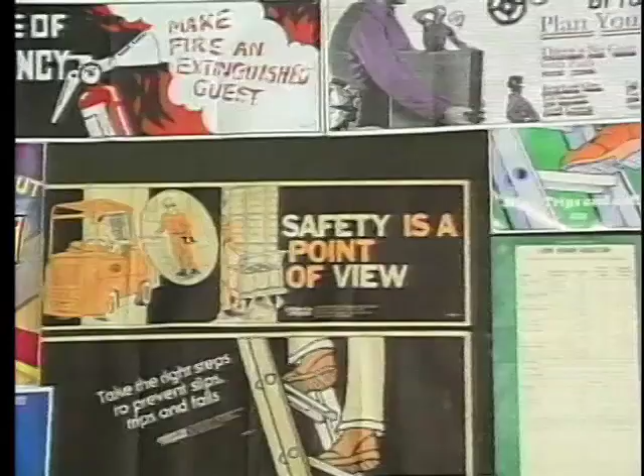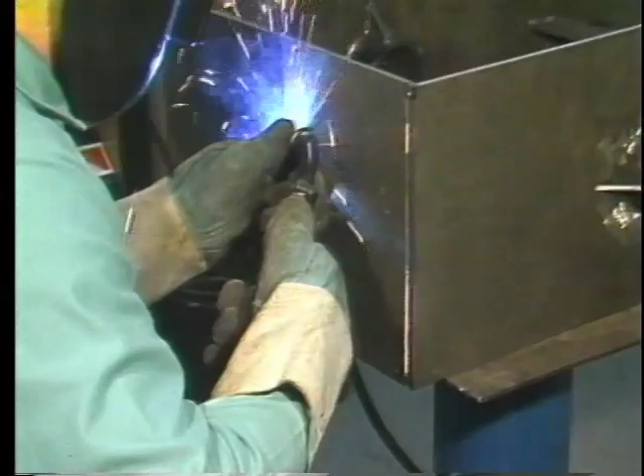Workers face daily exposure to potential hazards. Correct precautionary measures can prevent accidents and make welding as safe as any other metalworking occupation. Metalworking hazards include exposure to hot metal, sharp edges, and working around moving machinery. For welding, there are additional hazards such as electric shock, arc radiation, air contamination, flying objects, fire and explosions.

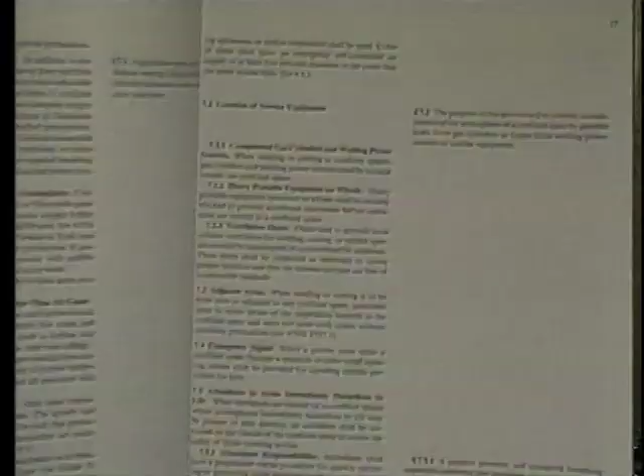To ensure safety for workers, there are laws which prescribe regulations and warnings. The Occupational Safety and Health Act makes many national standards enforceable by law. The most important is the American National Standards Institute Z49.1, Safety in Welding and Cutting. This standard states that welding and cutting operations pose potential hazards from fumes and gases, electric shock, heat radiation, and even excessive noise.

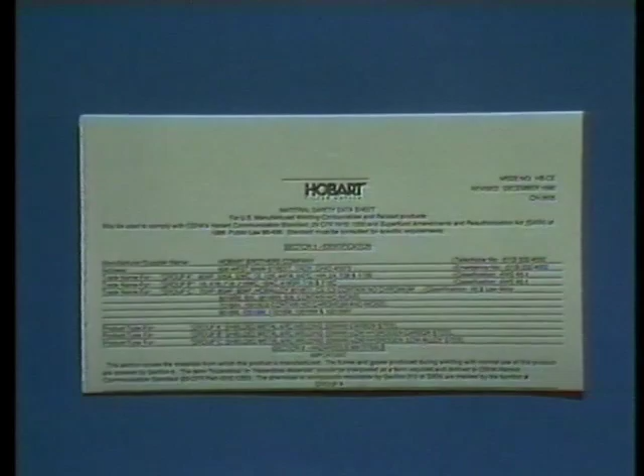Employers are required to establish comprehensive hazard communication programs to inform workers about dangers in the workplace. By the same token, the employee is obligated to learn and use safe practices, obey safety rules, and take proper care of equipment. The use of material safety data sheets, or MSDSs, is mandatory. These cover the potential hazards of every substance taken into the workplace.

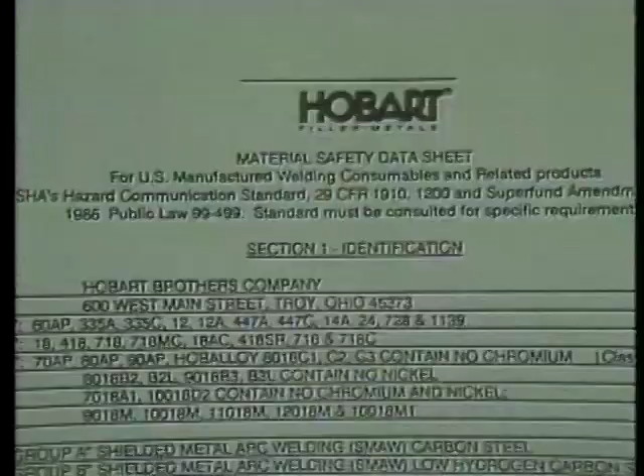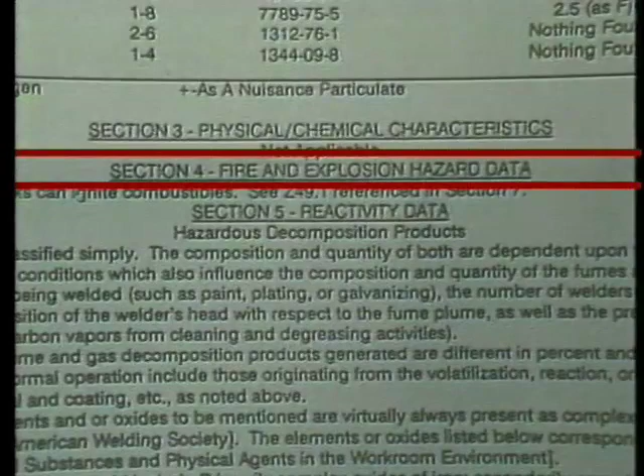Welding electrode suppliers furnish MSDSs, which should be kept on file in the personnel or welding department. Copies should be given to all supervisors, welders, and anyone connected with the welding area, and should be read and understood by all. An MSDS is divided into sections that identify the manufacturer and materials and list any hazardous filler metal ingredients, physical and chemical characteristics, potential fire and explosion hazards, emergency procedures, precautions and control measures, and reactivity data which explains what happens to the filler metal during welding.

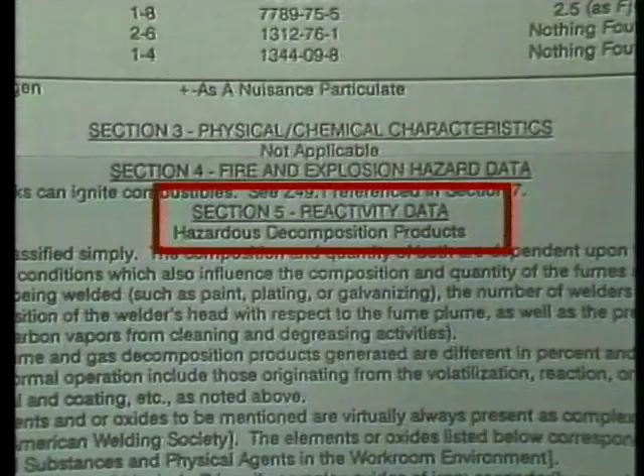The electric arc is a powerful source of visible, ultraviolet, and infrared light, all of which can be harmful unless suitable protection is used. Proper clothing should have no openings or gaps which expose the skin to ultraviolet arc burns. All personal clothing should be flame retardant, dry, and free of oils. Wool clothing is better than cotton because it doesn't disintegrate or catch fire.

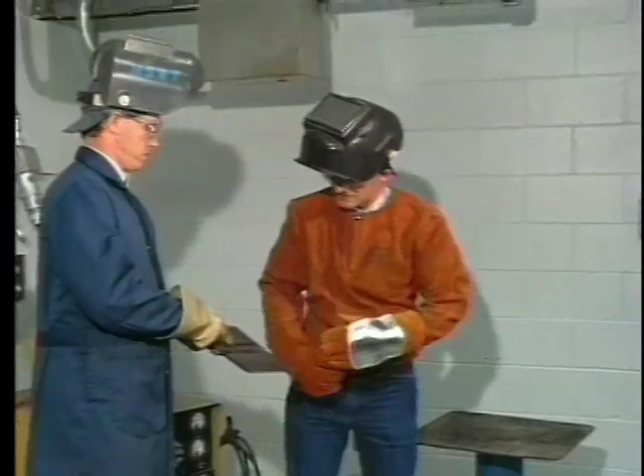For heavy-duty welding over 200 amps, a leather jacket or apron, leather gauntlet gloves, safety glasses, spats, head cap, and a helmet with a proper filter lens must be worn. Pants legs should be without cuffs and cover the shoes. The shoes themselves should be safety types with high ankles. Even with light-duty welding under 200 amps, the skin must not be exposed. Other personnel in the welding area should wear the same type of protective clothing.

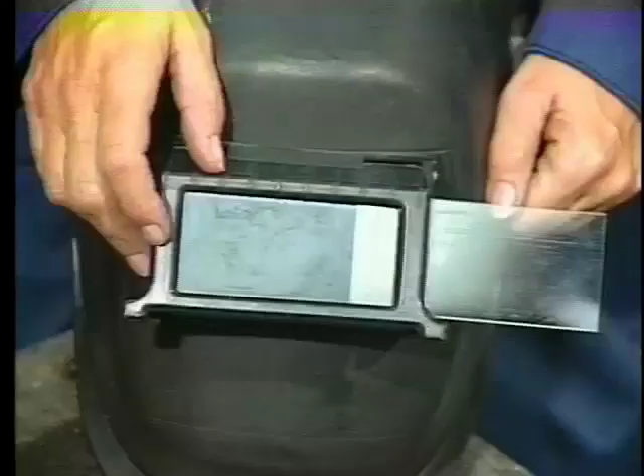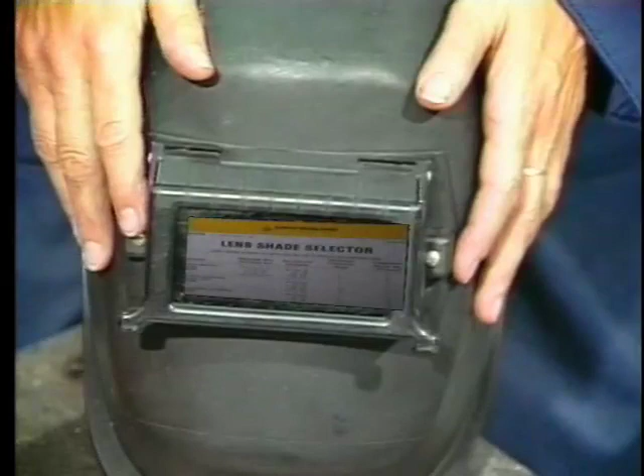Whatever the welding application, safety glasses should be worn at all times. Contact lenses may be worn for welding, but these do not replace safety glasses. Helmets should have the proper filter lens, protected from spatter by a clear cover plate. Lens shades use a numbering system to help select the amount of darkness required for the amount of amperage used. Refer to the American Welding Society's specification for safety in welding and cutting to determine the proper shade needed.

If unprotected eyes are exposed to the arc even briefly, ultraviolet arc burn can result, which causes the sensation of hot sand in the eyes for up to 48 hours after exposure. Up to 6 hours may pass before any symptoms appear. Eye drops or eye washes will give temporary relief. If the pain persists for more than 24 hours, a doctor should be consulted.

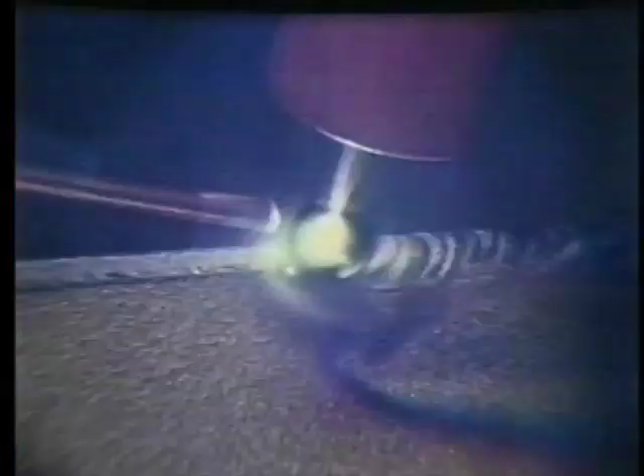Precaution signs should be posted in and around the welding area and should be in agreement with the American Standard specification for accident prevention signs. This includes warnings that anyone with a pacemaker should take special precautions or avoid arc welding areas. Heat from the arc is infrared radiation, which is harmless if the welder is properly protected. But ultraviolet radiation is invisible and much more potent.

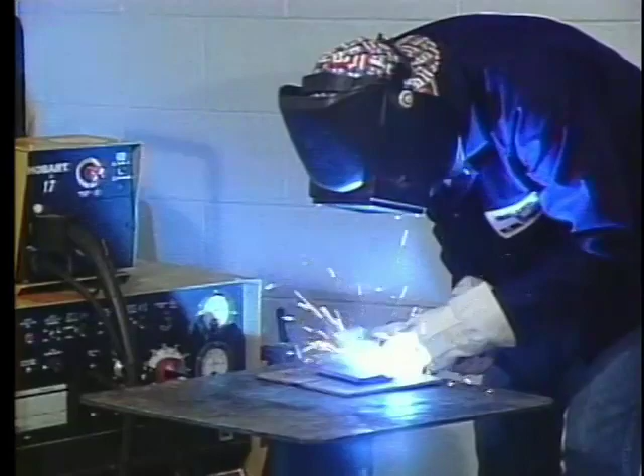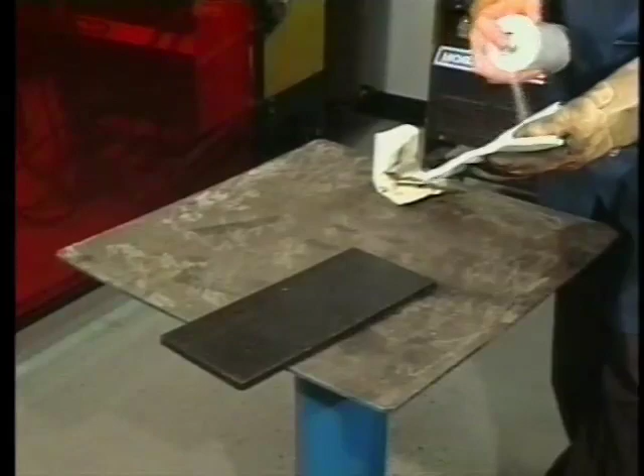Screens should be used around the welding area to shield nearby workers from the radiation and should be free from tears. If welding is done in an enclosed booth, it should be painted with a flat finish that will not reflect ultraviolet light. Metal degreasing or cleaning solvent operations should be kept at least 200 feet away from the welding area, since the ultraviolet radiation can decompose some cleaning chemicals into phosgene gas.

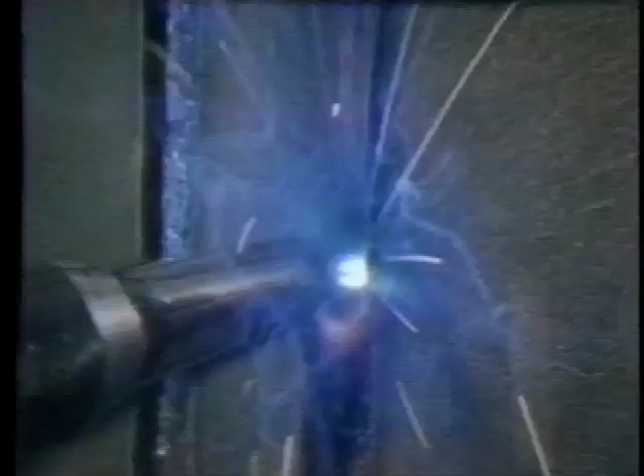This is a harmful substance with the odor of new mown hay, and if detected, the area should be evacuated and ventilated until the gas has cleared. Because of this hazard, make sure solvents on metal are thoroughly removed before welding begins. Ultraviolet light can also produce ozone, an active and harmful form of oxygen that can cause coughing, wheezing, chest pains, or a burning sensation. Proper ventilation will reduce the ozone concentration around the arc area. It is not a long-range hazard since it changes back into oxygen a short distance from the arc.

Electric shock is associated with all electrical equipment or tools. Tools usually operate on ordinary 115-volt household voltage, but this is higher than the output of a conventional arc welding machine. National standards are set by NEMA, the National Electrical Manufacturers Association, or by the Canadian Standards Association. Use only welding machines that have one of these names on the nameplate.

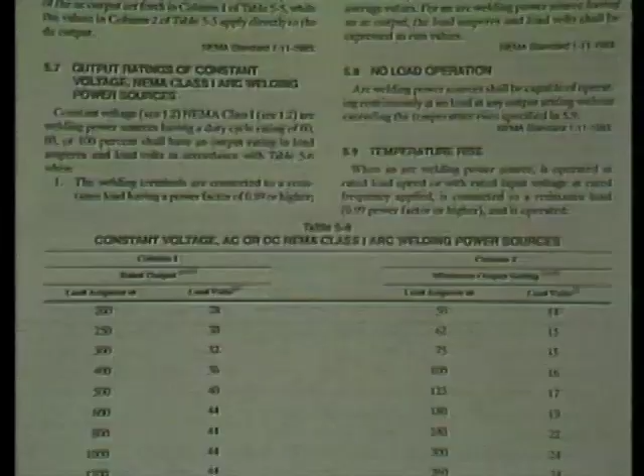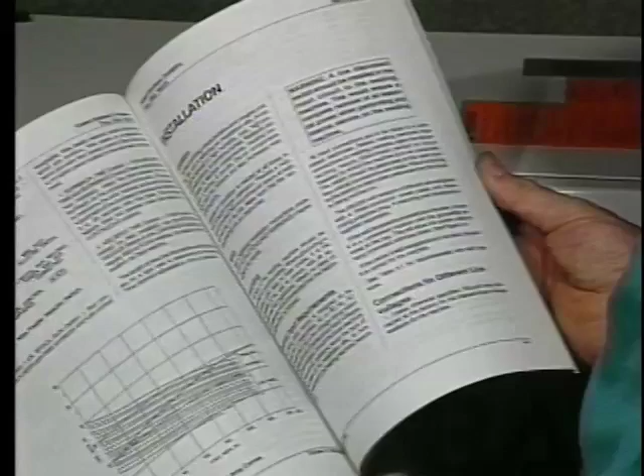NEMA specifications provide classes of weld machines and requirements for duty cycle and maximum no-load voltage. Machines must be installed in accordance with NEMA and local codes. Instructions are given in each manufacturer's manual.

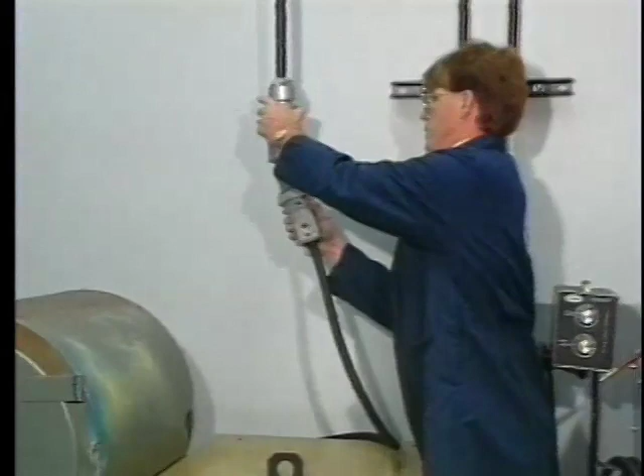If a grounding lead or conductor is part of the power supply cable, be sure it is connected to a properly grounded switch box or building ground. Use a separate grounding lead if it is not part of the supply cable. Note that this does not replace connecting the machine's ground lead to the work surface, which is essential for safe welding operation.

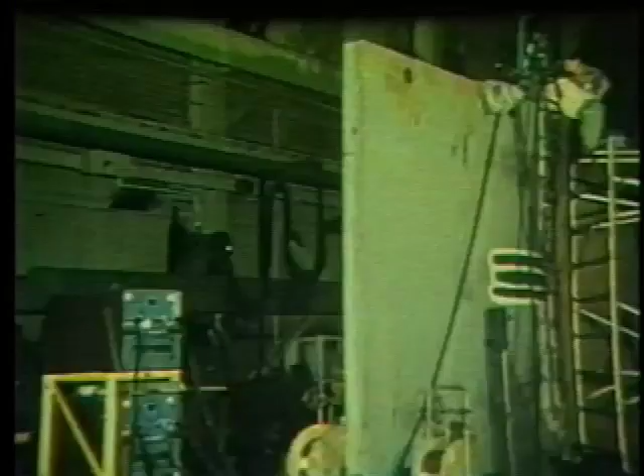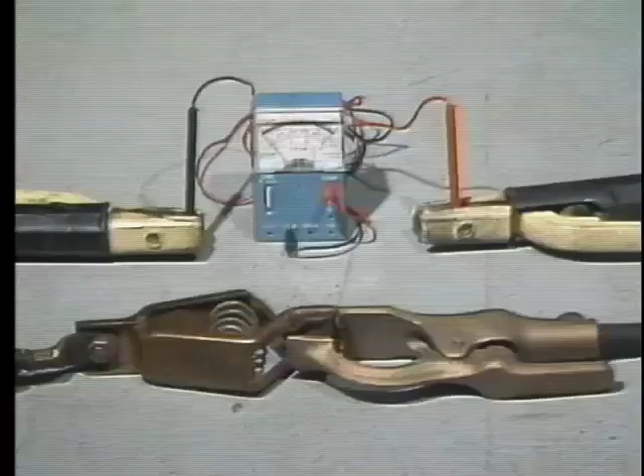When paralleling transformer machines, identify each phase of a three-phase power line. This assures that the machines will be in proper phase with each other. To check this, connect the work leads together, and then measure the voltage between the electrode holders, and it should be practically zero.

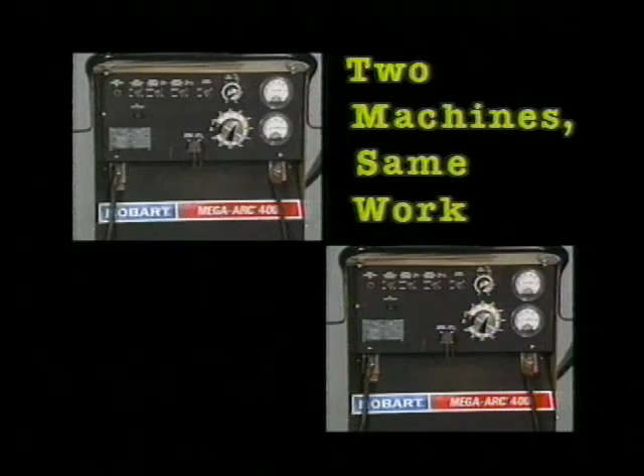If more than one direct current machine is connected to the same weldment, be sure that both are set to the same polarity, both positive or both negative. If they are not, the voltage between the electrode holders will double. Also, do not attach both AC and DC machines to the same weldment.

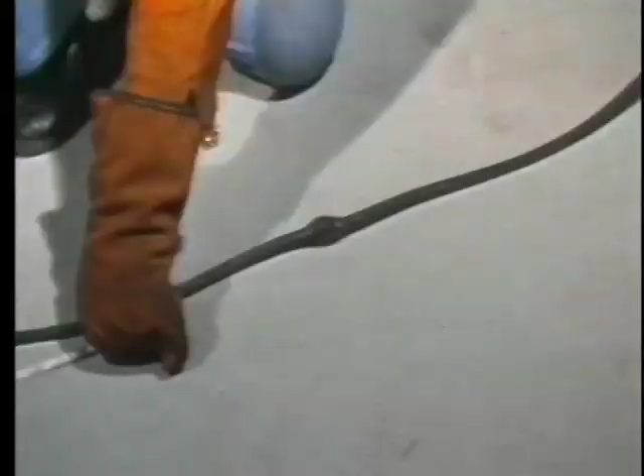Electrode holders should have flexible cables. No splices should be within 10 feet of the electrode holder or gun, and they should be well insulated. Welding machines should be located in a well-ventilated area with nothing obstructing the ventilation ports. Electrode and work leads should not be wrapped around the machine or the welder.

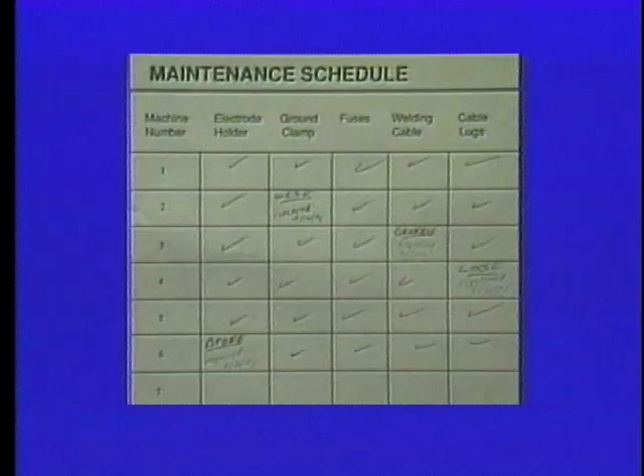Work areas must be kept dry. Dampness increases the chance of electrical shocks. A regular inspection and maintenance schedule should be maintained and records kept.

No matter how small the problem, no one but properly trained maintenance personnel should attempt repairs on welding machines, cables, guns, work clamps, and electrode holders. All power sources should have disconnect switches for maintenance purposes. Notify your supervisor of any problems or potential hazards.

Air contamination is the smoke and fumes rising above the welding operation. These contain two types of contamination: particulate matter and gases. Adequate ventilation will reduce smoke hazards. Potential harm from fumes and gases depends on the chemical composition of particulate matter, the concentration at the welder's breathing zone, and the duration of exposure.

Particulate matter is small, often invisible solids suspended in the air, such as tobacco smoke, household dust, and pollen. When welding, the kinds of particulate matter relate to the type of electrode or filler metal, the welding process itself, the current employed at the weld location, atmospheric conditions when welding outdoors, and the composition of base metals and coatings.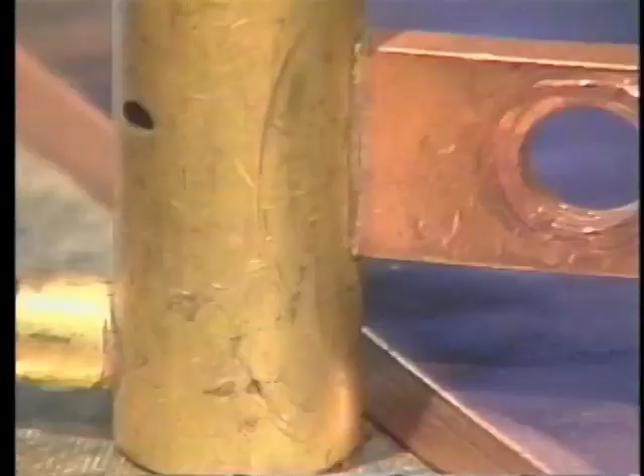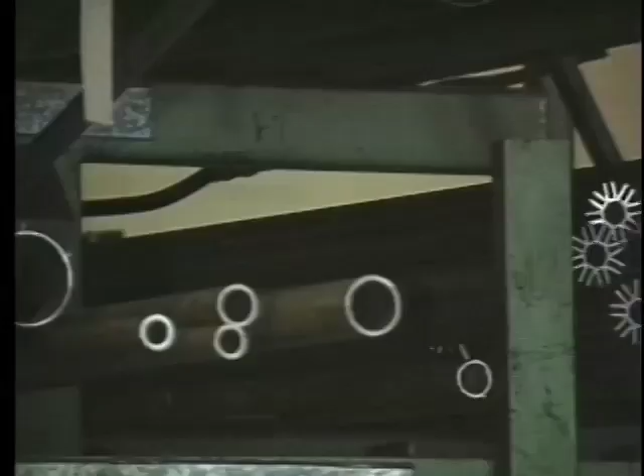Certain metals create hazardous airborne contaminants, such as brass, bronze, zinc, and others. Coatings on the metal, such as paint, oil, grease, or plastic, can also release contaminants. Welding on old painted steelwork can produce smoke containing particles of lead. Newer pipe is sometimes coated with a plastic protective material which can be harmful. Proper ventilation and parent metal cleaning and preparation will protect the welder from all such fumes.

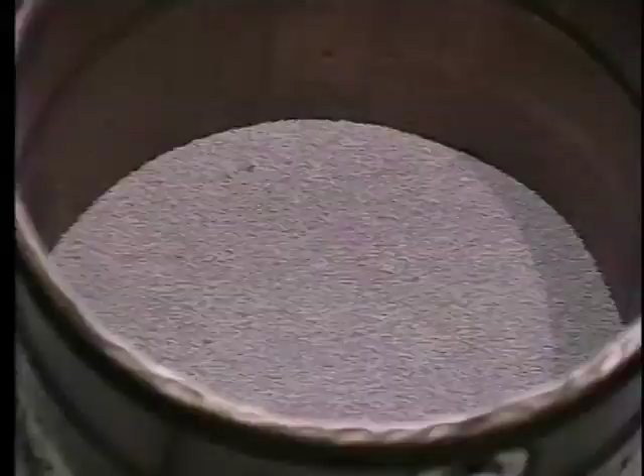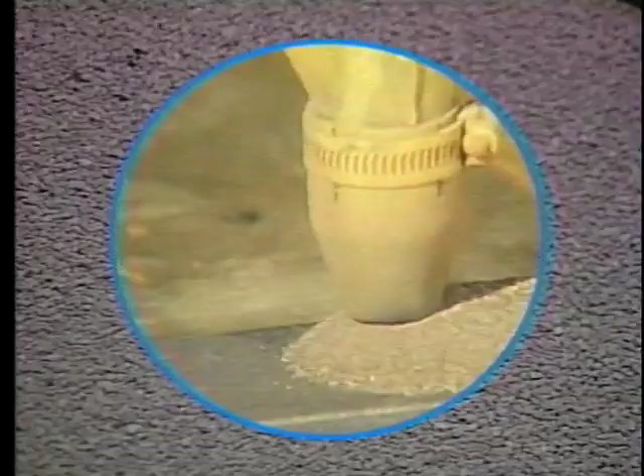An additional source of gases is flux, which is found in the coatings on shielded metal arc electrodes and inside the electrode wires used for flux cored arc welding. The flux used for submerged arc welding can also give off gases when heated. The most common gas produced by electrodes and filler wires is carbon dioxide. Carbon monoxide can also form. These gases should be removed from the welding area.

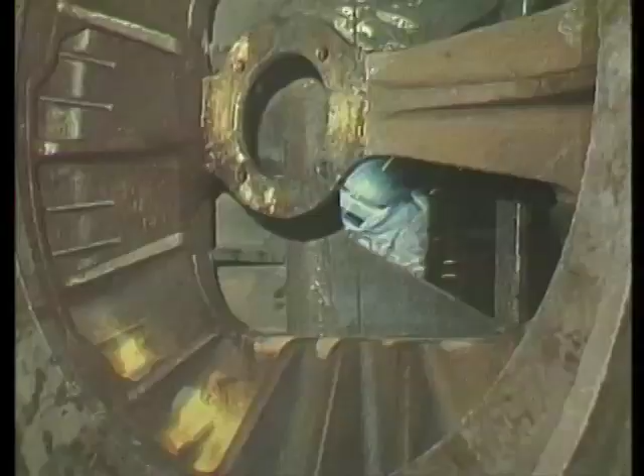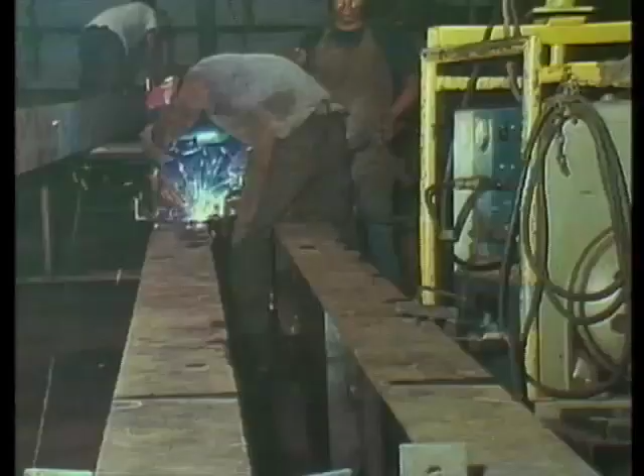Confined areas such as small and restricted spaces, tanks, pressure vessels, tunnels, or small rooms with poor ventilation can become death traps. The hazards here are poisonous, flammable, or explosive gases, oxygen depletion, or heavy concentrations of smoke and particulate matter. Exhausts from engine-driven machines are a prime source of carbon monoxide and carbon dioxide, even in less confined areas, and should always be channeled outside. Refer to American National Standards Institute Z117.1, Standard for Welding in Confined Spaces.

When welding in confined areas, lookouts should be assigned to watch the welders and other workers in the area. Voice contact should be maintained throughout the welding operation. In extremely confined areas like tanks or vats, welders should wear lifelines, harnesses, or both, so they can be pulled out if they are overcome.

The atmosphere in enclosed areas should be checked before welding is attempted. An explosimeter can be used to test for explosive concentrations of gases and adequate levels of oxygen. Oxygen should not be used in place of compressed air to ventilate enclosed compartments. If the oxygen content of the air is even 5% more than normal, the area could become combustible when an arc is struck.

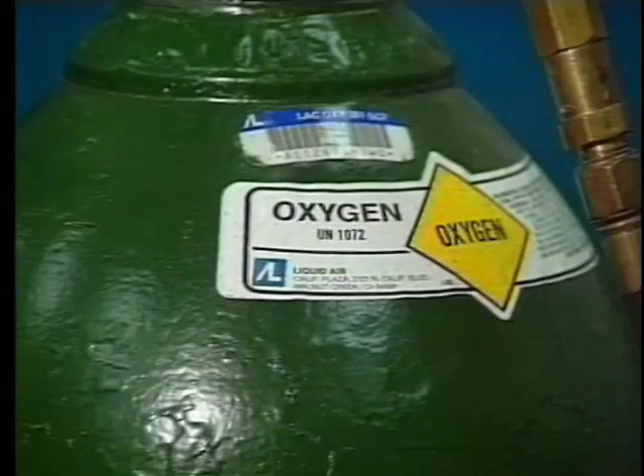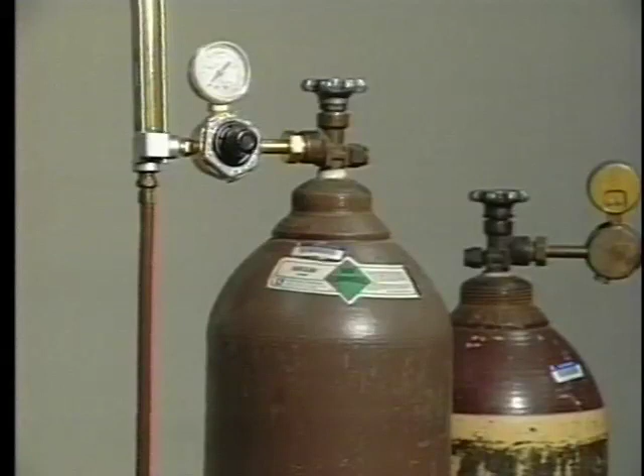On the other hand, if heavier than air shielding gases such as argon and carbon dioxide are used in confined spaces, the oxygen content will drop, perhaps below breathable levels. Such areas should be monitored to assure proper oxygen levels. To ventilate these areas, air exhaust and fresh air supply systems should be used. If this is impractical, a respirator or self-contained breathing apparatus can be used. Respirators can be selected and fitted by trained personnel following OSHA standards.

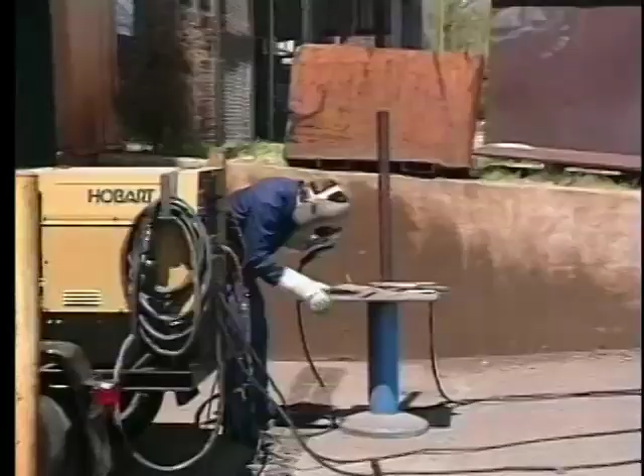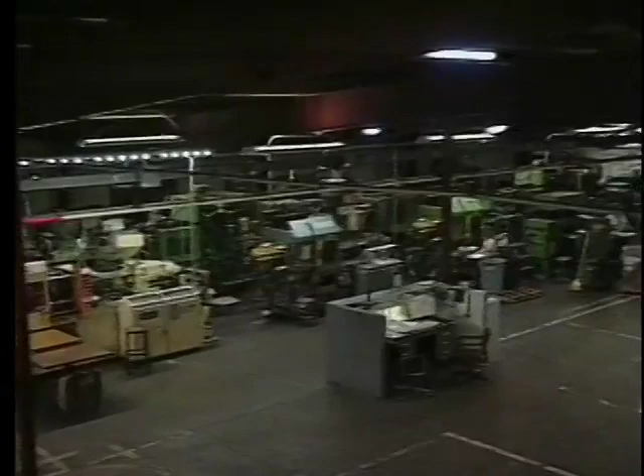There are 3 types of ventilation. Natural ventilation is welding outdoors or indoors in an area that provides 10,000 cubic feet per welder with a ceiling of 16 feet and with no partitions, balconies, or other structural barriers. When hazardous materials are welded, natural ventilation must be supplemented.

General mechanical systems use roof exhausts, wall fans, or other large air movers in order to keep airborne contaminants low and prevent explosive gas mixtures from accumulating. Such systems can also be used in individual welding booths.

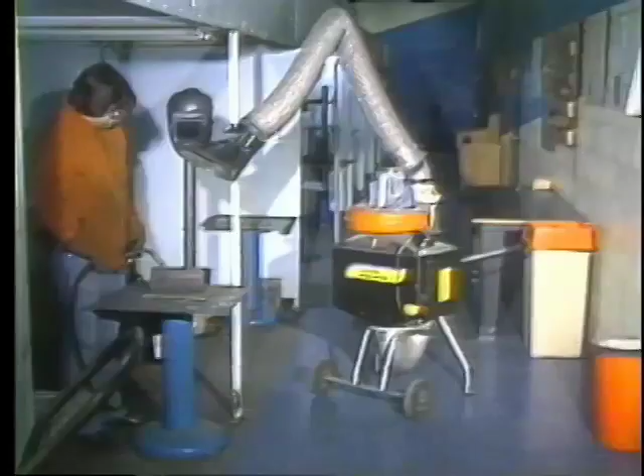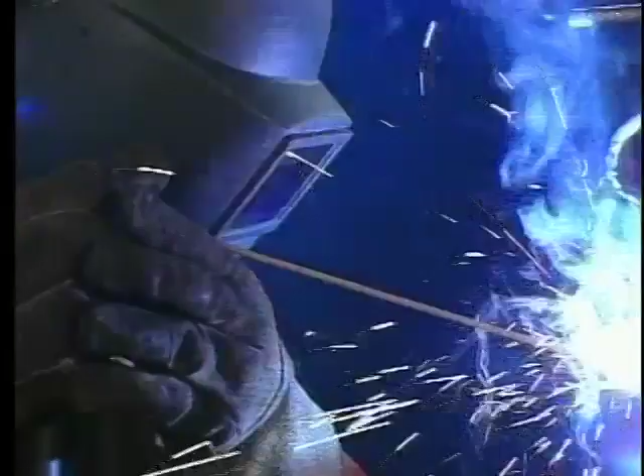Local exhaust systems have a fixed or movable hood placed near the work area or even in the welding gun. Movable hoods can be adjusted as desired to pull smoke and fumes away from the welder. To check if the area is properly ventilated, samples can be collected and analyzed from the breathing zone under the welder's helmet.

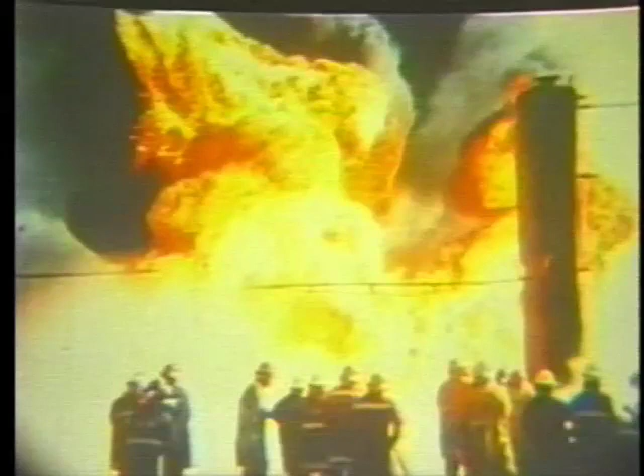Many industrial fires are caused by cutting and welding in areas that are not specified or approved for such work. The 3 elements of the fire triangle, heat, fuel, and oxygen, are present in most welding operations. The heat from the arc, torch, or hot metal, the fuel from gases or combustibles in the area, and oxygen in the surrounding air. Sparks can fly up to 35 feet or more and fall through any cracks or openings

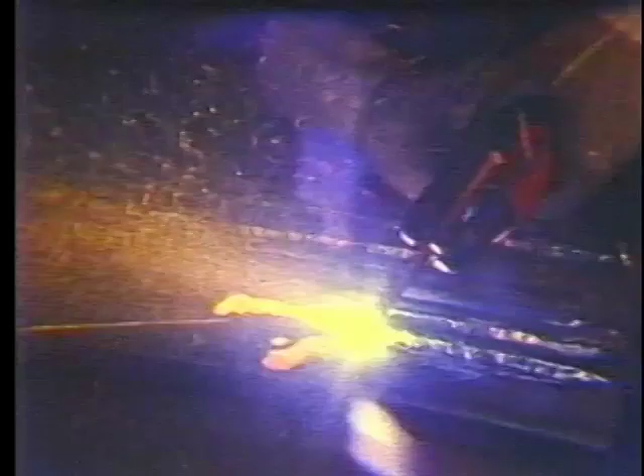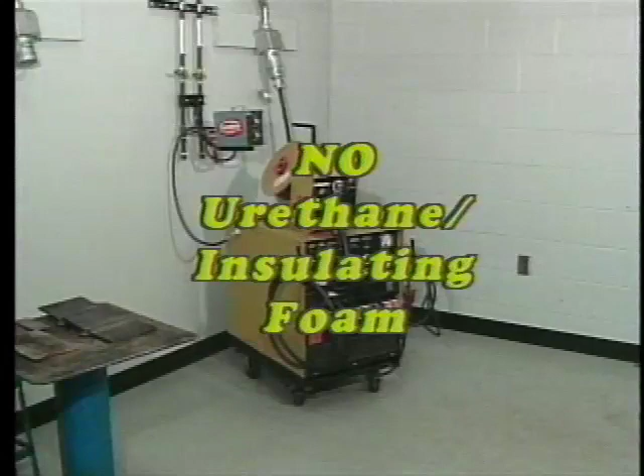in partitions and floors. All combustibles or flammable materials should be removed from the welding area. The area itself must be constructed of non-combustible materials. No urethane foam or other insulating organic foam should be part of the area. Gas lines should be installed in accordance with codes and specifications. Fuel gas cylinders should be stored in specified, well-ventilated areas or outside away from oxygen. They should be stored vertically, with valves closed and caps on, whether empty or full.

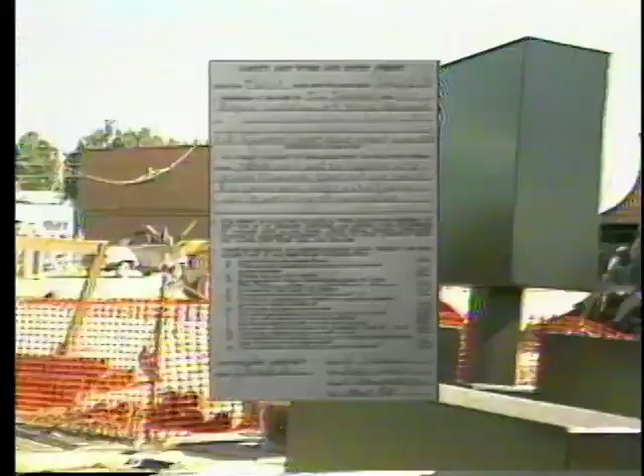Hot work or welding permits are required whenever welding or cutting is done on hazardous materials or anything that once contained such materials, or for areas not designated for welding. These are signed and dated by those involved. Hot work permits are especially needed for maintenance welding, such as with construction equipment in the field, aircraft, ships, or other potentially hazardous areas. Have a fire extinguisher within easy reach, and when the danger is great, have an extinguisher operator standing by.

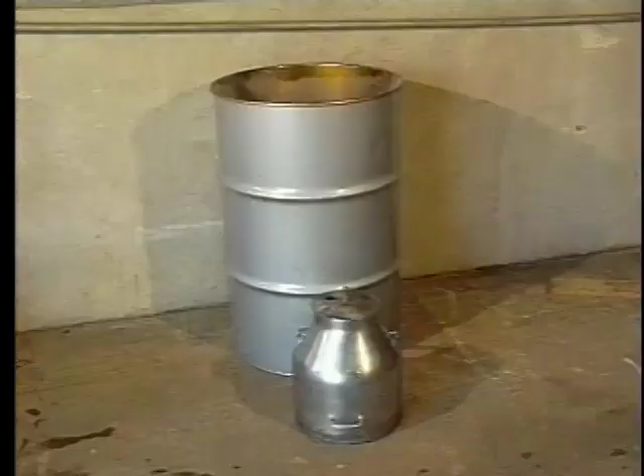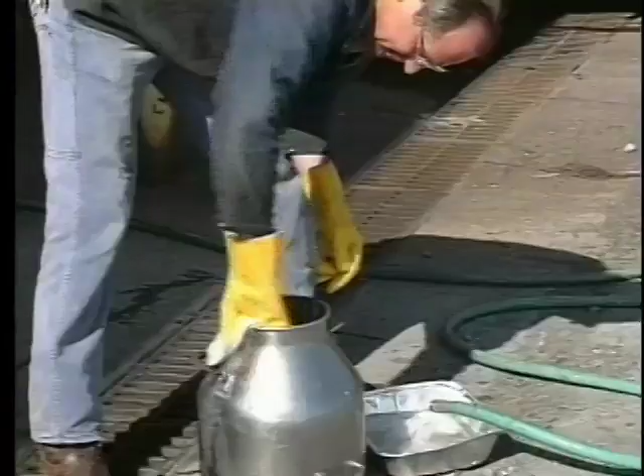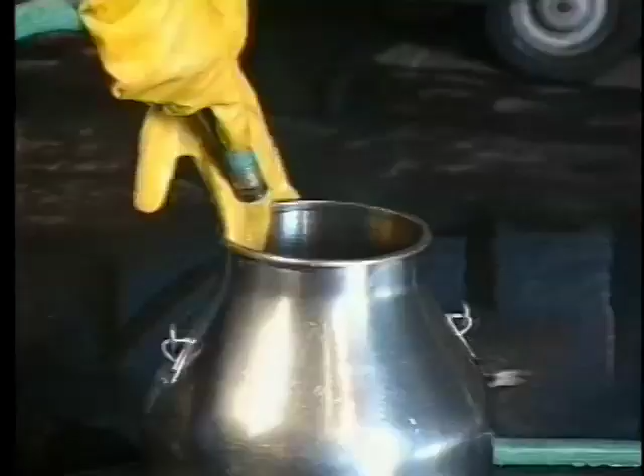Containers must be given special attention. Vent any confined air before welding. Then, empty containers must be prepared properly to eliminate dangerous chemicals or their residues. Cleaning containers is preferably done outdoors. If it must be done indoors, assure that the area is well ventilated. Drain all materials and match the cleaning method to the type of material. For water solubles, clean with water. Otherwise, use a hot chemical solution or steam. Cold water methods are less effective.

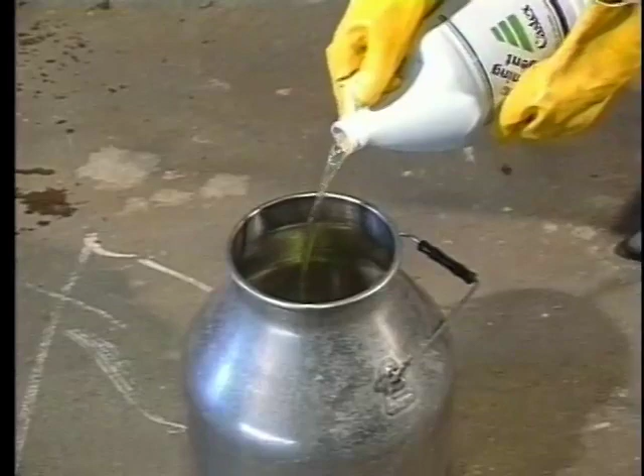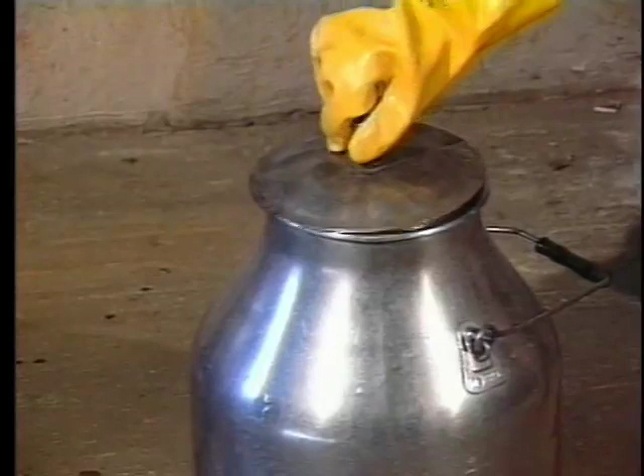The container can also be filled up to 25% with cleaning solution, then cleaned thoroughly. Afterwards, low-pressure steam is injected and permitted to vent for several hours. Afterward, inspect the tank to make sure it is thoroughly clean, then close any openings. Let it sit for 15 minutes, then test a further sample of the air inside. When the tank is determined to be safe, it should be so marked and dated.

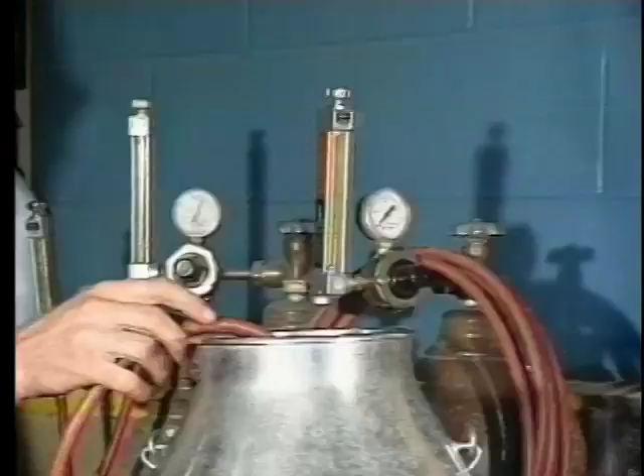As an additional precaution, the container can be filled with water up to within a few inches of the weld area and vent the space above the water so air can escape. The container can also be filled with an inert gas, one that is not flammable or reactive.

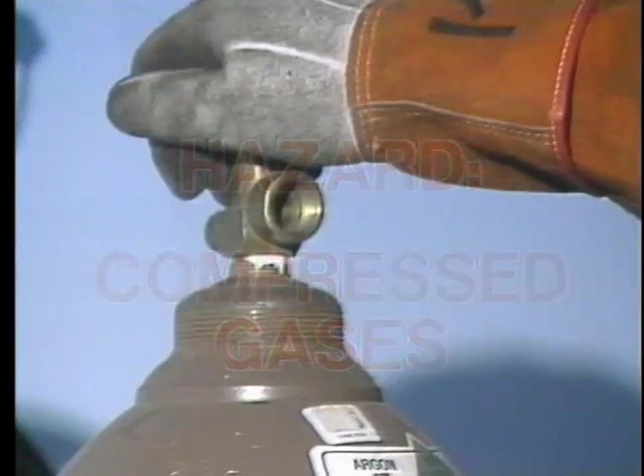Compressed gas cylinders are always potential dangers. If the valve is suddenly broken, the pressurized gas can turn the cylinder into a rocket. The United States Department of Transportation and the Canadian Board of Transport Commissioners set regulations governing gas cylinders. Some of the most important are: the contents should be legibly marked by chemical or trade name using decals or labels. Cylinders should be condemned and never reused when they develop leaks, internal or external corrosion, dents, bulges, or any evidence of rough use that may have weakened the cylinder.

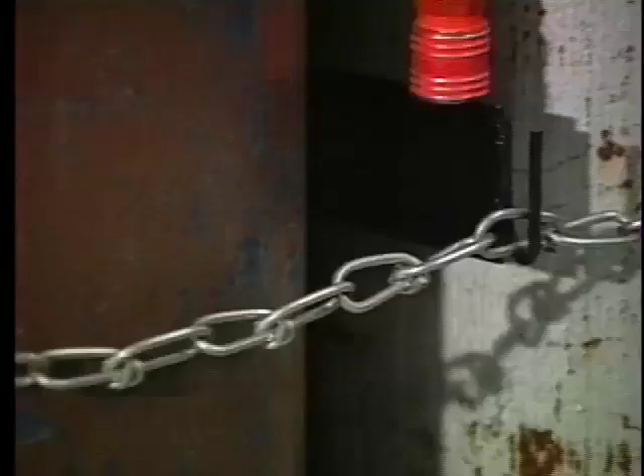They should be stored in cool, well-ventilated areas where the temperature never exceeds 130 degrees Fahrenheit. As mentioned earlier, they must be stored upright with valves closed and protective caps in place. They should also be clearly marked when empty. Cylinders should be secured by chains or clamps, whether in storage or in use. Small portable cylinders should be mounted securely on specially designed trucks.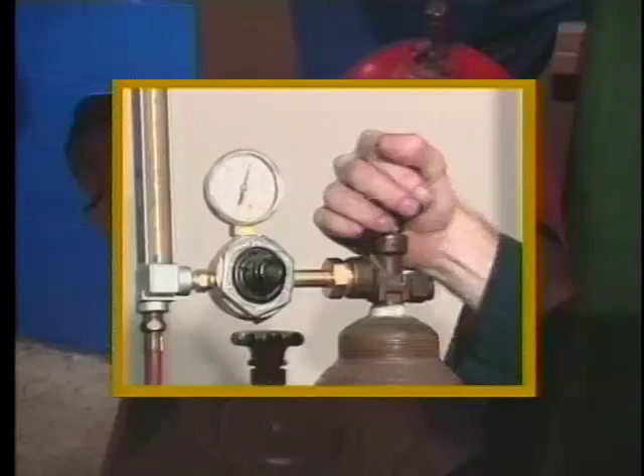Because the contents are under extremely high pressure, cylinders should not be dropped, struck, or rolled around. Use hand wheels to open the valve, not wrenches. Avoid strong magnetic fields, especially magnetic cranes, and make sure they are nowhere near the electric arc and its circuit.

When slag is chipped or ground from a weld, it can fly with surprising force. Particles and dust are common in welding areas, so wear safety glasses with side shields. Welders may be required to work in radioactive areas. Qualified personnel should make the decision as to how welding should be performed in such areas.

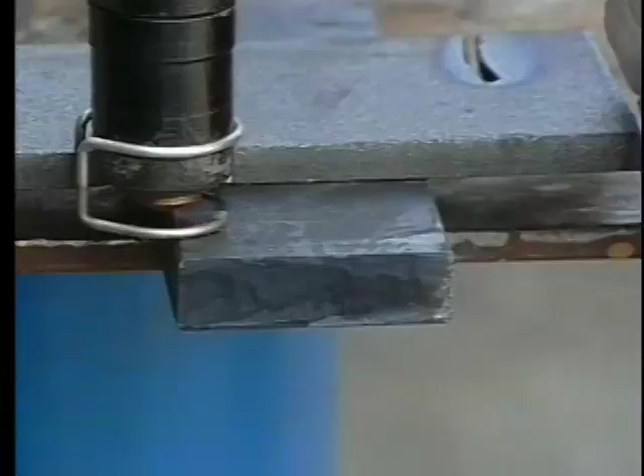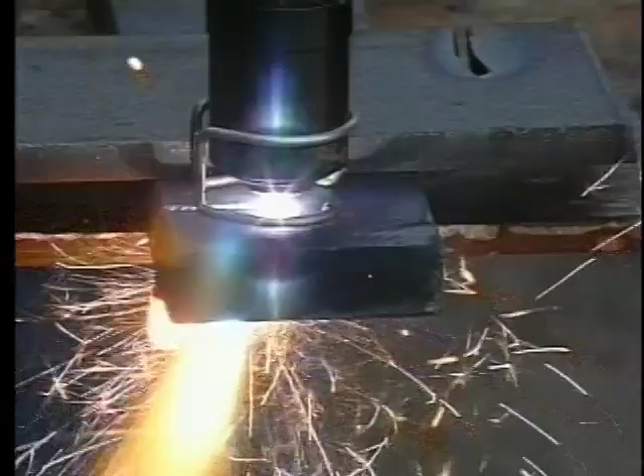Excessive noise levels can cause hearing loss. Peening, chipping, air carbon arc gouging, or plasma cutting can create enough noise to cause temporary or permanent damage. If you're not sure about the noise level in your specific area, measuring devices are available and should be used. In some plants, hard hats should be worn to protect against falling articles.

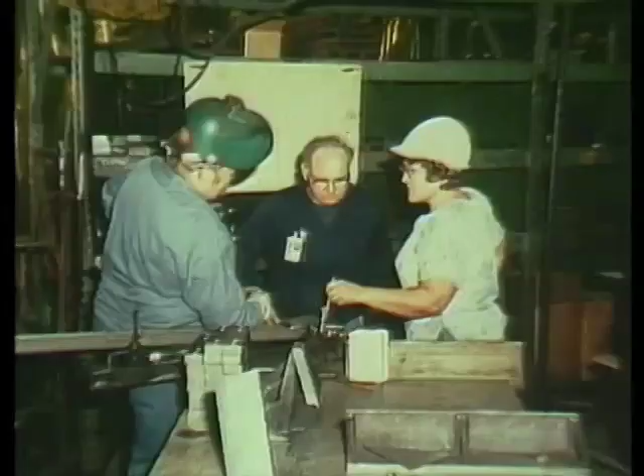Keep the work area clean. Electrode stubs should be placed in containers and not just dropped on the floor where they can be tripped over. If a question or problem arises where you work, consult the safety director. Remember, personal injury can be sharply reduced or practically eliminated by being aware, being informed, and just using common sense.